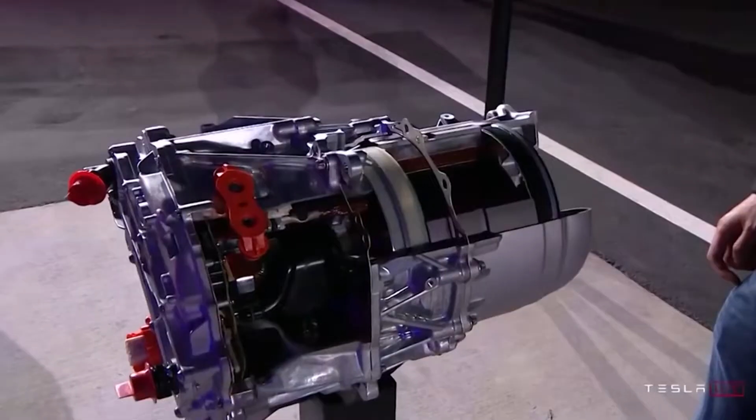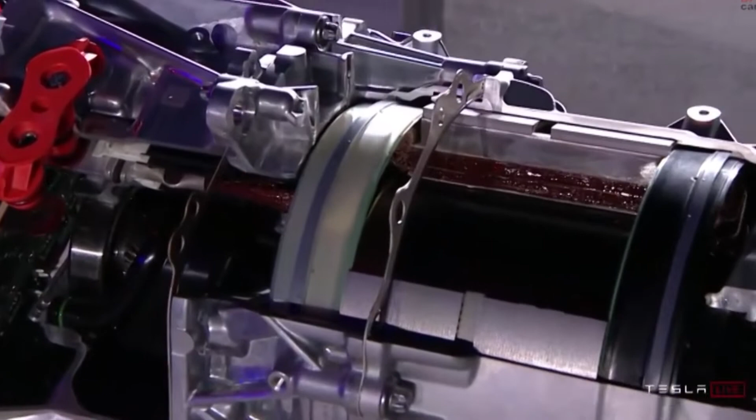Just released, Elon Musk unveils a new insane engine. One of the most essential inventions ever devised by man is the electric motor. From physically changing the way we think about the world to paving the way for the future. Things are about to get much more interesting now that Elon Musk has revealed Tesla's amazing new motor. It'll blow your mind how it works.

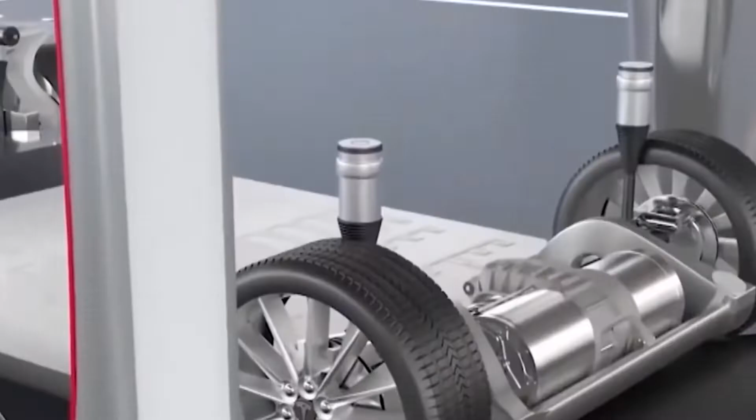Let's take a closer look at the building of a Tesla electric drivetrain, which Nikola Tesla created over a century ago. The stator and rotor are the first two important components to consider. The rotor is basically a collection of short-circuited conducting bars linked by end rings. The stator is powered by a three-phase AC power supply. A magnetic field is created by the three-phase AC in the coils.

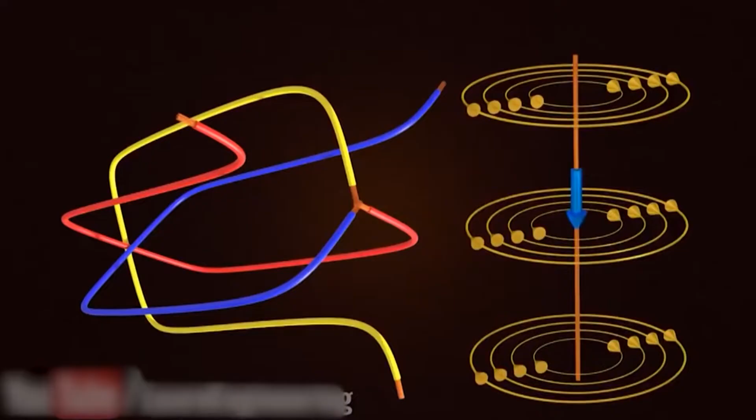A four-pole magnetic field is produced by Tesla motors. The rotor bars are turned by a current generated by the rotating magnetic field. The rotor speed of an induction motor frequently lags behind the RMF speed. An induction motor is quite powerful despite the lack of brushes and a permanent magnet.

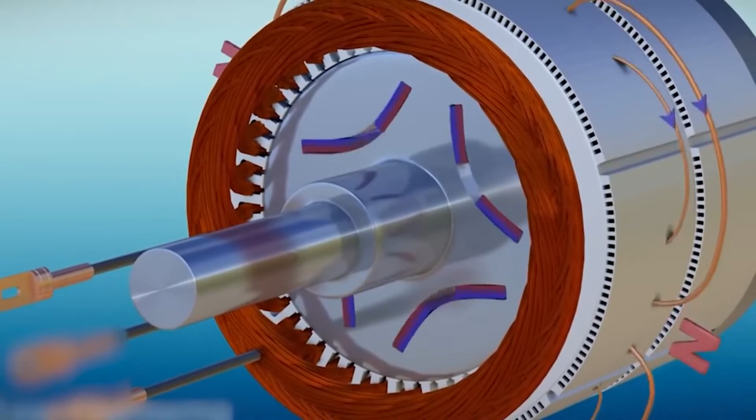Induction motors are unique in that their rotational speed is determined by the frequency of the AC power source. This means that the frequency of the power source can be changed to change the spinning speed of the wheel. Tesla's speed control is incredibly simple and reliable. Tesla motors have a range of rotational speeds from 0 to 18,000 revolutions per minute, RPM.

The induction motor receives power from the battery pack. Because the source generates DC power, it must be converted to AC power before it can reach the motor. This is when the inverter enters the picture. Not only does the inverter convert DC to AC, but it also adjusts the frequency of the AC power, allowing the motor speed to be controlled. The inverter may change the motor output power by changing the amplitude of the AC. In a sense, the inverter is the brain of the electric vehicle.

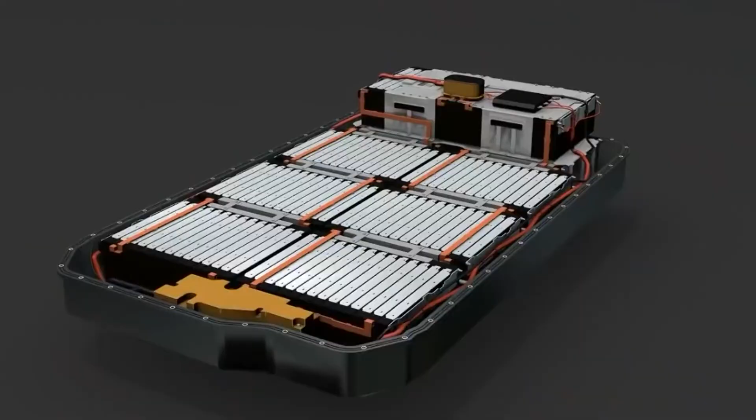The battery packs are made up of massive collections of regular lithium-ion battery cells similar to those seen in everyday life, which most people are surprised to discover. To produce the required electricity to run the electric car, all of these cells are connected in a series and parallel fashion. Glycol coolant is circulated between the cells through intertwined inner tubes.

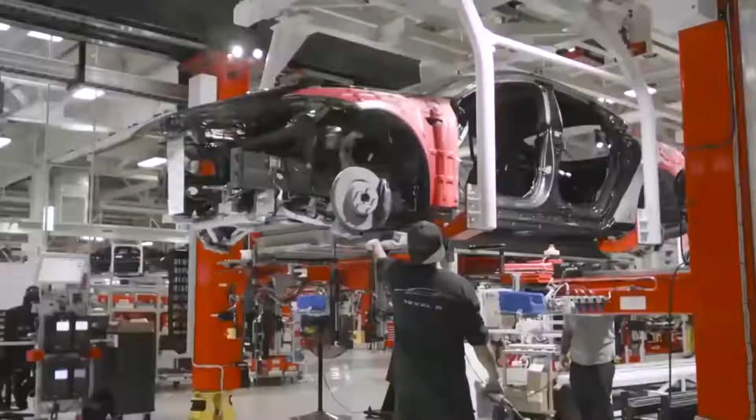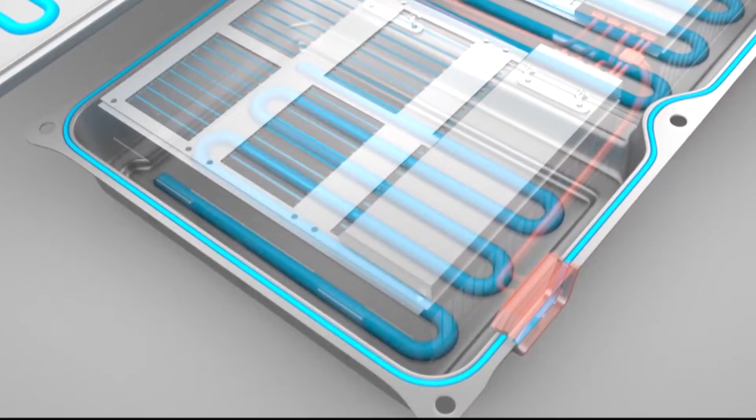This is one of the concepts that distinguishes Tesla from other electric vehicle manufacturers. Instead of a few large cells, multiple small ones are used to provide critical cooling. As a result, thermal hotspots are reduced, resulting in a more even temperature distribution across several cells and longer battery pack life. All of these cells are organized into detachable modules, totaling around 7,000 cells divided into 16 modules.

The Tesla Model S Plaid is currently the best display of Tesla's engineering prowess, at least until the Roadster arrives. Teslas have always been fast, and the firm, led by its nerd-in-chief, looks to be nearly as capable of pushing inside joke limits as it is of achieving significant, industry-shifting advancements. It is entirely successful in driving Tesla's performance to ludicrous new heights.

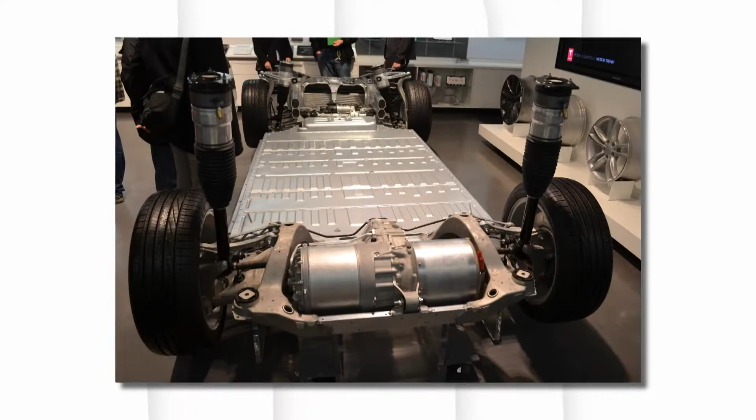It's the first Tesla to use 3 electric motors, 2 in the rear axle and 1 in the front axle, all of which are now permanent magnet synchronous AC machines. The Plaid features carbon fiber sleeved rotors, the spinning component of the engine. A carbon fiber cover holds each rotor together, enabling rotational rates of up to 20,000 RPM, which is roughly 25% quicker than before.

Because of the differing coefficients of thermal expansion between carbon and copper, Tesla asserts that the motor's copper wire must be coiled at extremely high tension, resulting in a particularly efficient electromagnetic field. Furthermore, the Plaid avoids a common EV problem, particularly in cars with a direct drive transmission, such as Tesla's, where power declines dramatically as speed increases.

The Tesla Plaid maintains 1,000 of its 1,020 horsepower all the way to its top speed of 200 miles per hour, according to Tesla. Despite having more horsepower, the Plaid weighed 175 pounds more than the Model S Performance variant, which weighed 4,828 pounds. So, how does the vehicle fare?

Motor Trend reports that at 152.6 miles per hour, the Model S Plaid completes the quarter mile in a remarkable 9.25 seconds. After a brutally forceful launch, the car accelerates from 0 to 60 miles per hour in under 1.98 seconds. The Plaid travels so quickly that it's tough to keep track of what's going on.

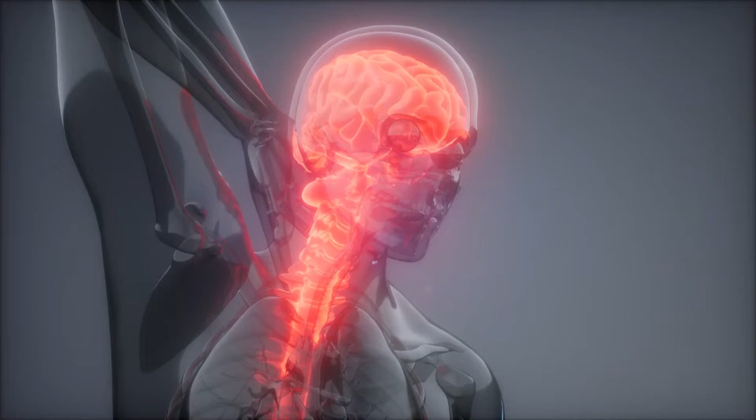As a quarter mile of pavement melts beneath you, the yoke becomes light in your hands, your neck muscles strain as your helmeted head digs into the headrest, and your surroundings blur into simple forms and colors. Despite the fact that the automobile cannot attain and sustain 200 miles per hour at this time due to the risk of damage to the powertrain, this is a significant achievement.

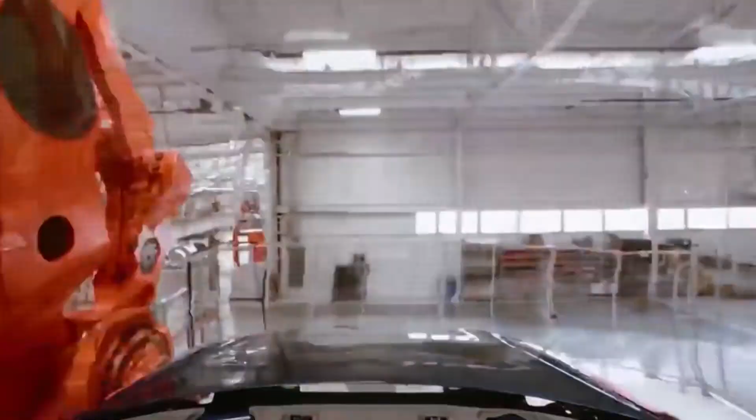Tesla intends to improve top speed restrictions for the next Roadster, which is expected to represent the next paradigm shift in EV performance technology. With such significant advancements in automotive battery technology, Tesla has made the decision to convert to lithium iron phosphate batteries. Tesla's decision is most likely a way to increase profit margins on its fully electric automobiles without having to raise prices. Tesla has already been lambasted for its unpredictable automobile pricing.

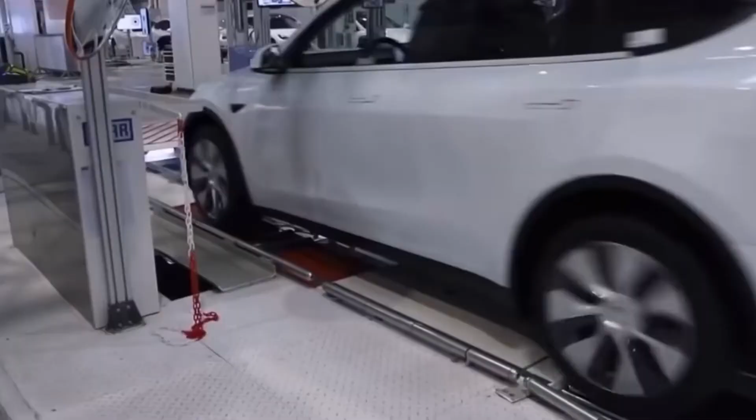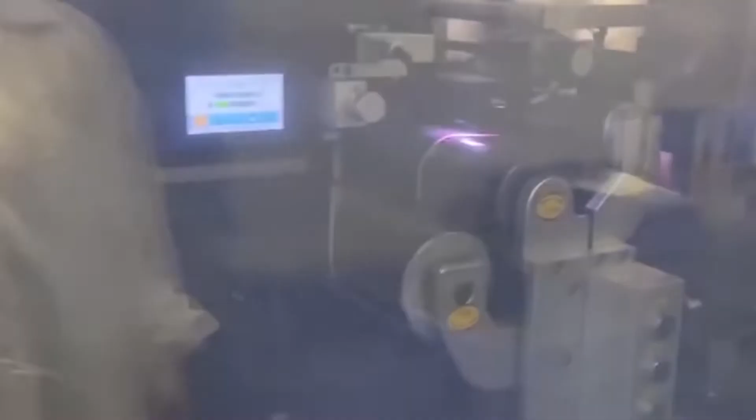The company is already producing autos with LFP chemistry at its Shanghai factory. It sells the automobiles throughout China, the Asia-Pacific area, and Europe, among other places. According to materials researcher and consultant Roskill, China pushes the use of this type of battery, and roughly 95% of LFP cathode production is supposedly done in China.

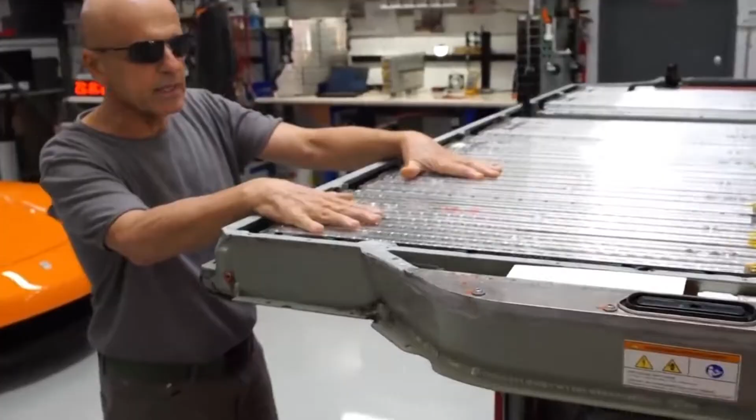In September 2021, Tesla asked Model 3 reservation holders in the United States if they would accept a car using LFP cells instead of the nickel cobalt aluminum oxide (NCA) cells used in previous Model 3 sedans shipped in North America. In addition, they are continuing their research and development of the new 4680 battery cells. The 4680 designator refers to the battery's diameter and height, which are 46 mm and 80 mm, respectively.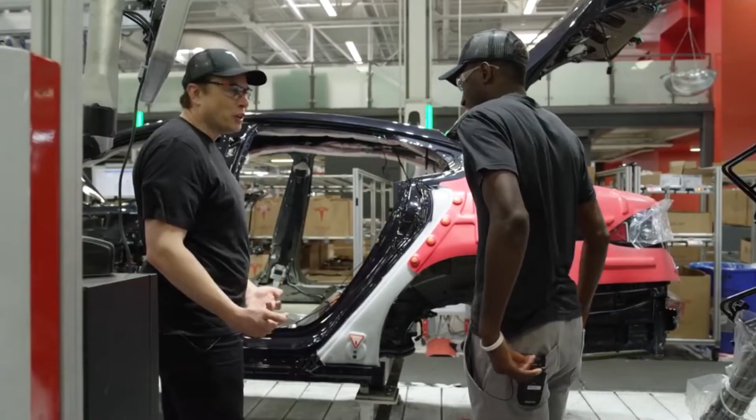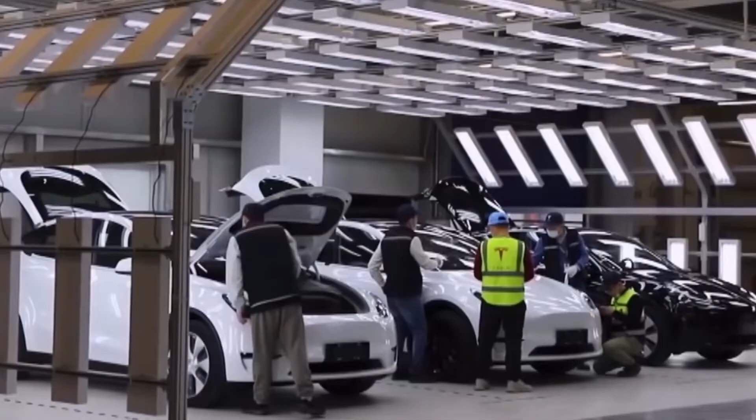While the new technology has been hailed as a big step forward in lowering the cost of entry for environmentally friendly vehicles, Tesla recently stated that plans to manufacture a more affordable hatchback called the Model 2 have been put on hold for the time being. To save money and improve efficiency, 4680 batteries can still be put in current Model 3 sedans, Model S sedans, Model Y SUVs, and Model X SUVs.

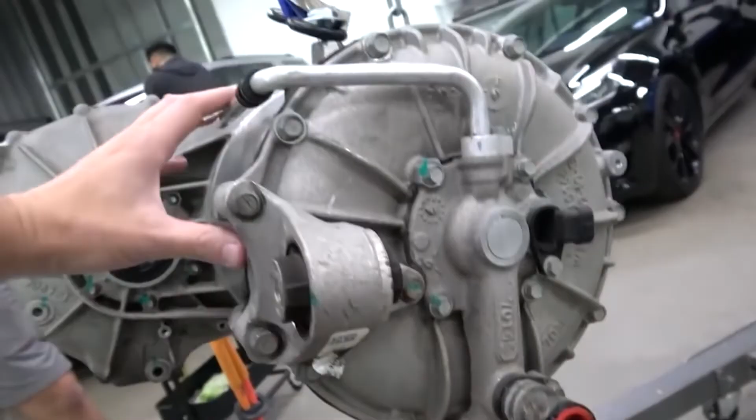Electric vehicles are reshaping the hypercar and racing performance environments. These new hypercars have pushed the engineering envelope to the point where, metaphorically speaking, internal combustion engines have run out of steam. Consider the Hennessy Venom F5 and the Bugatti Chiron, which are both capable of reaching top speeds without the use of electric propulsion. Combustion engines required about 150 years to acquire these levels of performance.

All-electric hypercars, like the Lotus Evija and the Rimac Nevera, have been constructed in recent years, and they easily outperform the Venom and Chiron in terms of power. It was the first-generation Tesla Roadster, crucially, that paved the ground for it to happen, and now Tesla must take the next significant step ahead to compete with their new rivals.

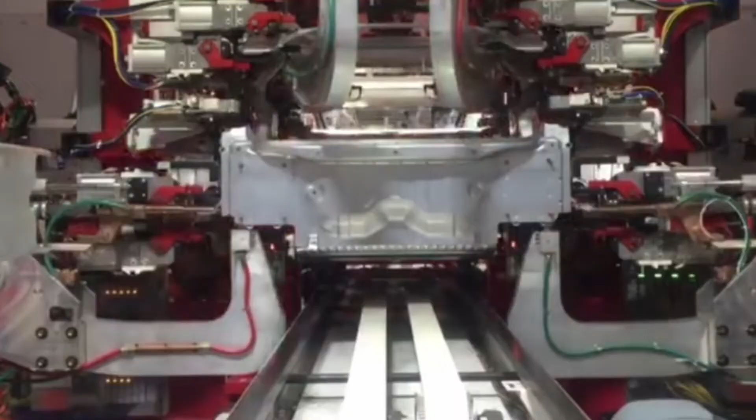The Tesla Roadster, which has been frequently delayed, received a rare update from Tesla chief designer Franz von Holzhausen. According to the designer, Tesla is still nervously working on the electric hypercar, which will be an exciting flying machine. According to Musk, Tesla intends to sell a SpaceX package that includes cold gas thrusters all around the car to boost performance. According to him, the kit may reduce the time from 0 to 60 miles per hour to 1.1 seconds. Can you believe it?

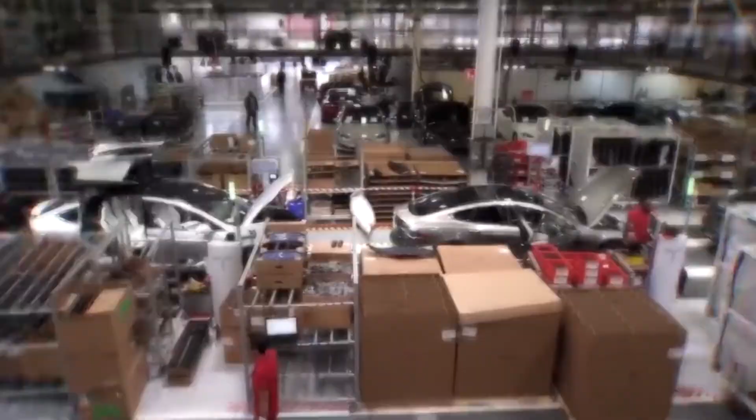That will be the fastest car ever built, and only a select few will be able to beat it in a reasonable amount of time if they can. We hadn't heard anything about the new Tesla Roadster in over a year, so we believed it had been delayed again. The manufacturer has had a difficult year due to chip scarcity, and the Cybertruck, which is clearly a priority, has been delayed as well.

When asked about the Roadster's schedule in September 2021, Musk indicated it has been postponed until at least 2023. Furthermore, the CEO noted that its arrival in 2023 will be dependent on how much drama Tesla experiences. Let's cross our fingers and hope for the best.